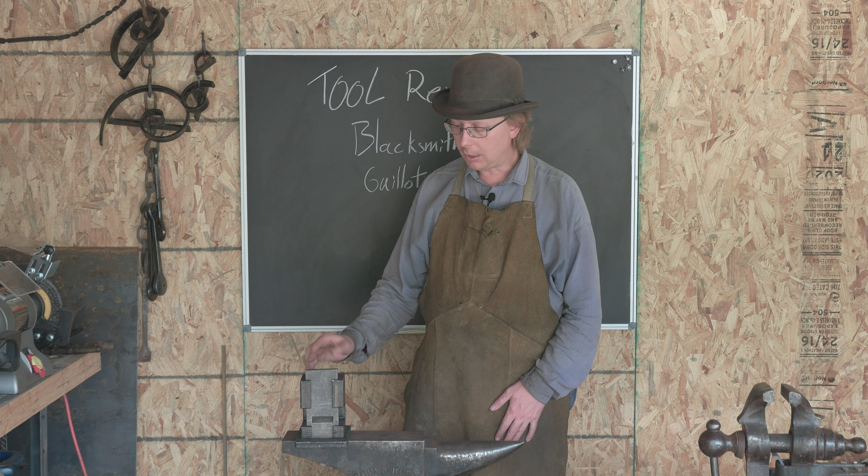You will need an Allen wrench to put it together, which it doesn't come with, as well as a socket wrench, both of which you are probably already going to have. Some Loctite is maybe not a bad idea, especially where these screws are going in to kind of hold things

together. They do tend to come loose if you don't have some Loctite or something in there holding it closed.

As you're hammering on the dies, you're putting a lot of force and it shakes, and those screws will come loose on you. So a little bit of Loctite will take care of that.

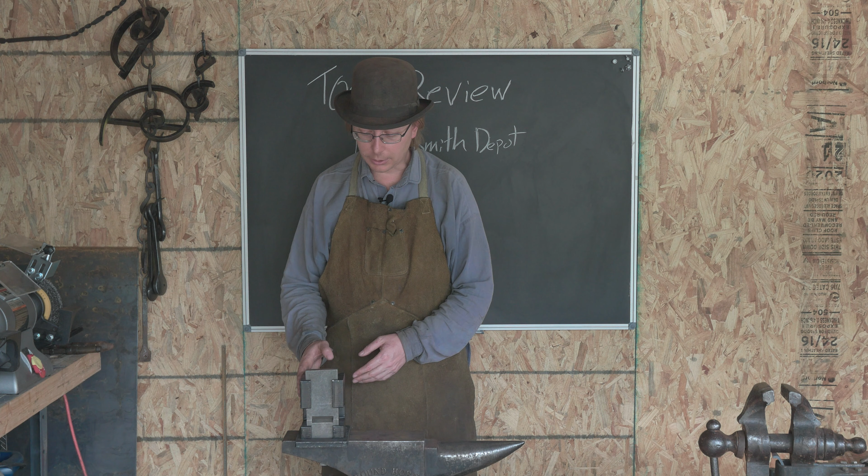But like I was saying, what this is used for is fullering in on two sides at once, or making a cut through steel from two sides at once. You can do the same thing. Let me grab something and I'll show you.

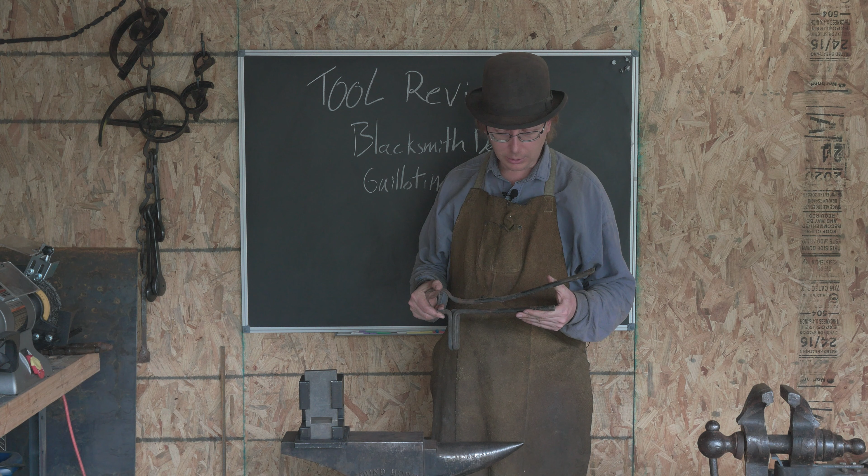So what I was looking for there is a spring fuller. This one's a little bent out of shape here. But the Blacksmith Depot guillotine, any guillotine, and the fuller kind of accomplish some of the same goals, right?

If I take a look at this large round die here, which is a 1/2 inch round die, and I think this is 1/2 inch square stock. Both of these are going to do the same thing. If I put a piece of steel in here, hammer down on it, it's going to hammer on both sides of those at the same time.

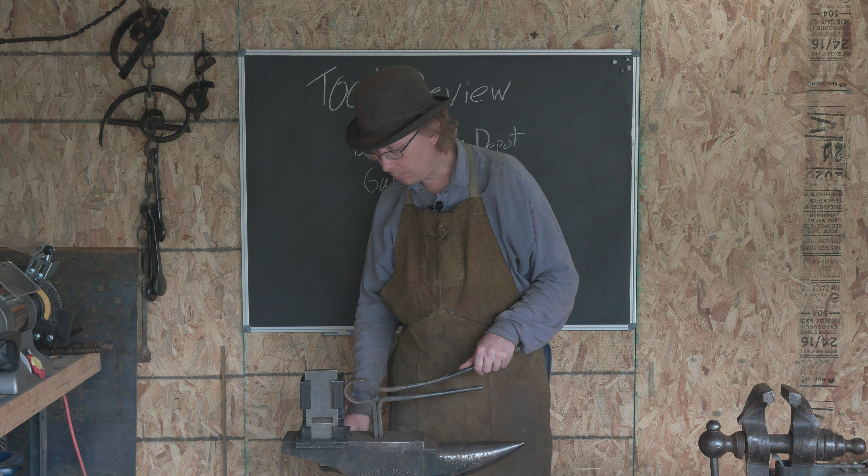You can get the same effect with the 1/2 inch die here from the Blacksmith Depot guillotine. What the guillotine's going to do that is a lot harder to do with a spring fuller like this is some of these other dies.

So we've got a wide variety of dies here, and hopefully you're able to see that in the video, where there's a cutting surface on one side, and then there's a gap here that is raised up from the foot.

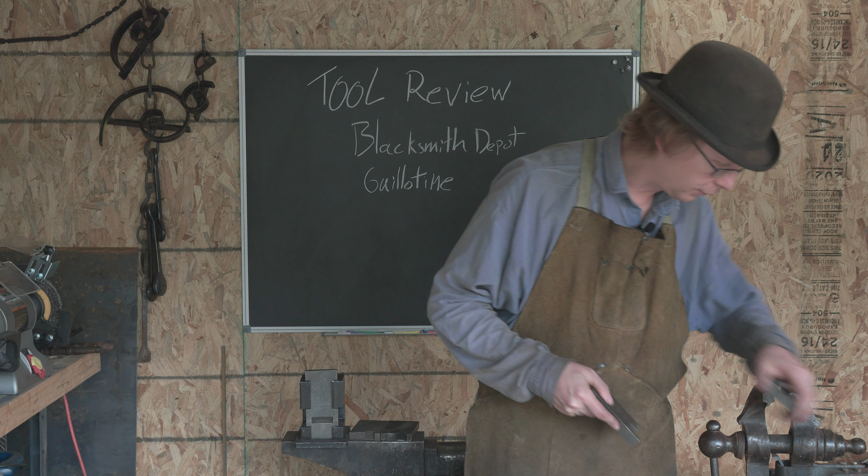So if I grab the opposite side of this, it's a 3/8 inch one here,

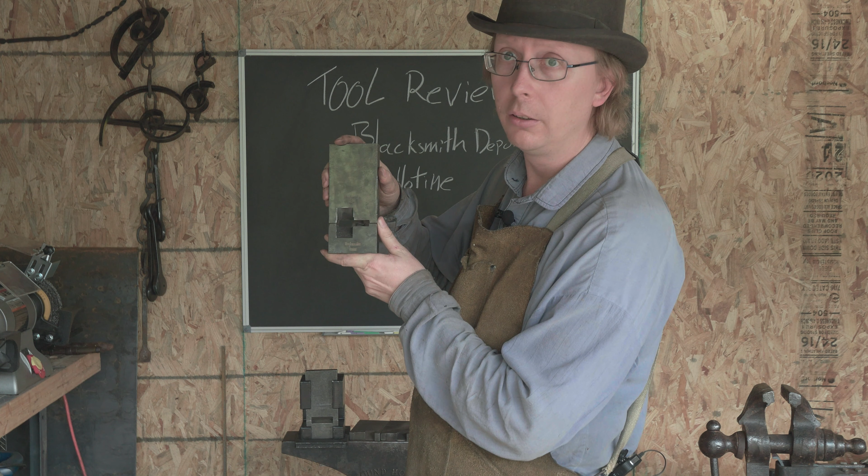get kind of close so you can see. So these two are going to go together like this in the guillotine. And what it does is it gives you a 3/8 inch gap here and then a 3/8 inch gap here.

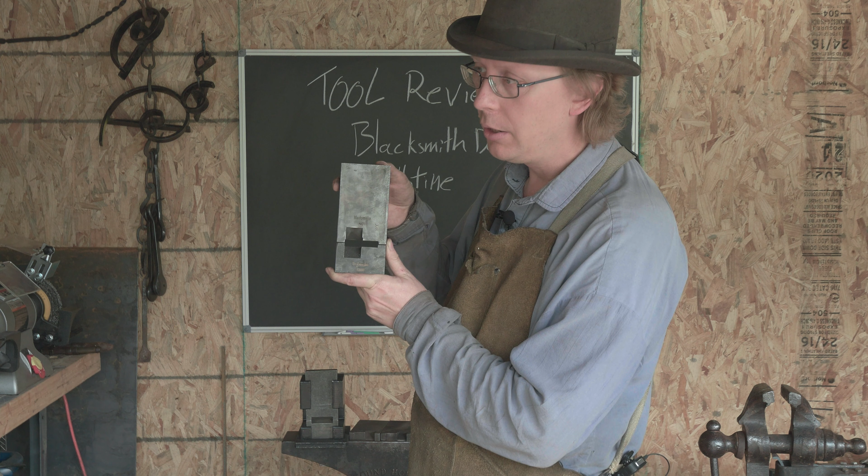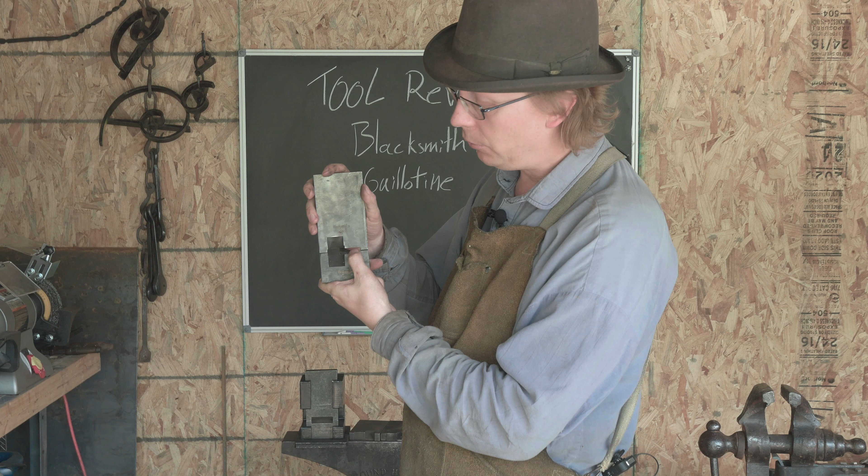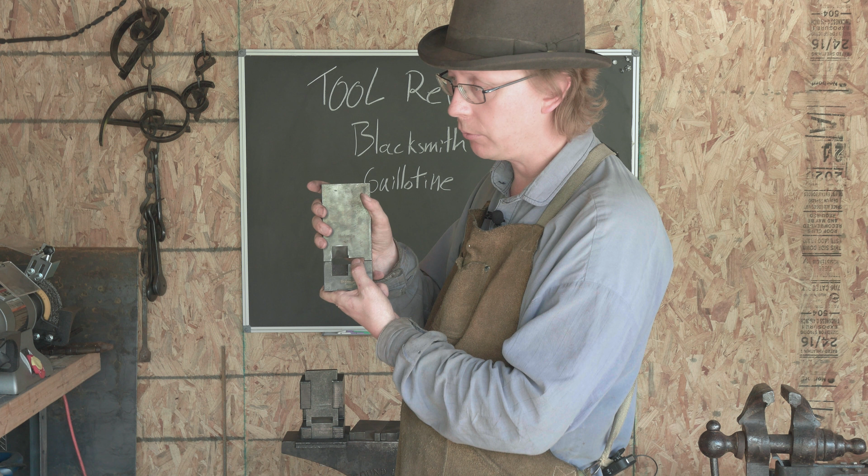So I can take a larger piece of stock, put it in, and then cut a shoulder that's 3/8 of an inch. I can then use this flat section here in order to draw out the material past that cut all the way down to 3/8 of an inch, so that I've got a nice round 3/8 inch section, or square 3/8 inch section, shouldered off from a larger material.

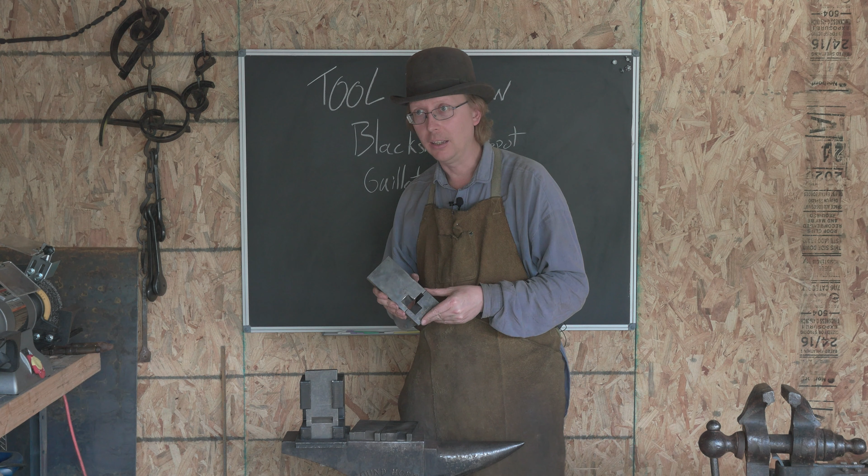This is incredibly useful when you're making tenons, or you're going to rivet something and you want to create a shoulder and then use the tenon in order to rivet two pieces together. Can you do this over the edge of the anvil? Yeah. Is it harder? It definitely is, right? You have to have some pretty accurate hammer blows as you're doing that set down. There's a lot of a chance for some missed blows and messing things up. This is pretty surefire and works well every time.

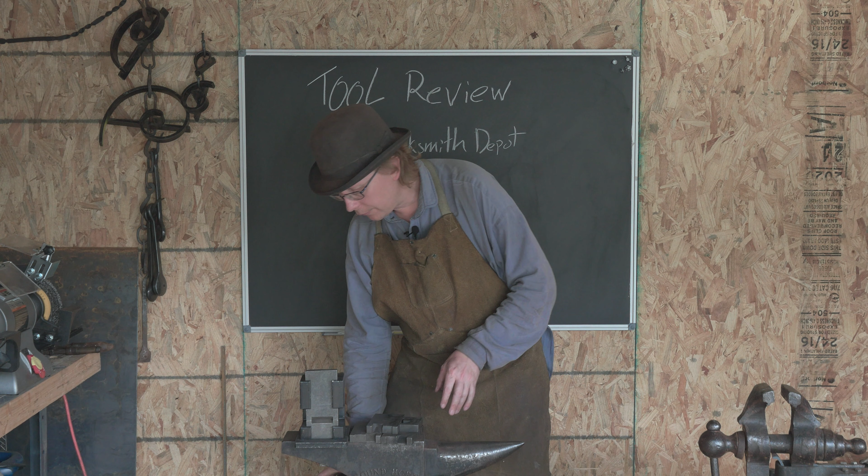So we'll actually take a look at how to use this tool in order to make a tenon. That'll be kind of the demo portion of this. With these kits, if you buy all of the sizes for these kind of tenoning, you get a 1/4 inch, a 3/8 inch, a 1/2 inch. On the round dies, you get a 1/2 inch. What is this one? A 1/4 inch. And then this one here is actually a side cutter. So,

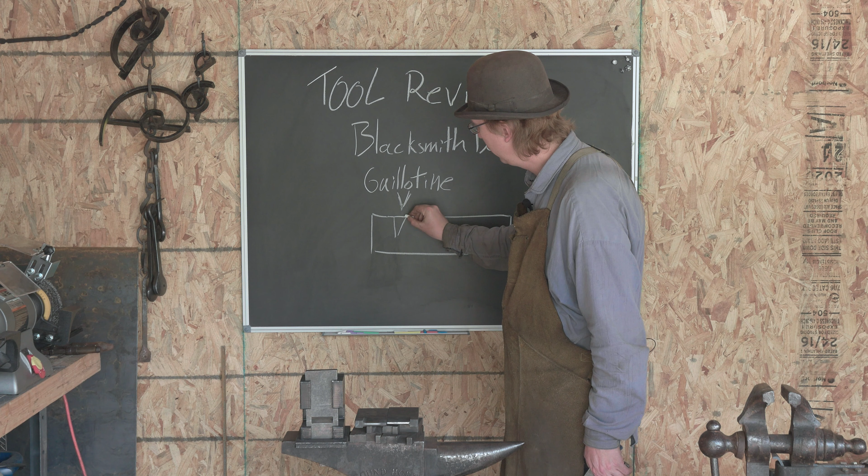right, if you got your Hardy tool, your cut-off Hardy tool, depending on how you grind it, or using something like this, you can set it up so that as you cut through a piece of steel, you get one side that's flat and all of the angle is on the other piece. And that's what this is used for. So if I want to cut something where I've got a flat side, actually I'll draw this here. Right, I've got my bar of steel. And if I've got a cutter that's shaped like a V, as this goes through, what you're going to wind up with, right, if I cut through from both sides, is a bit of an angle on each side.

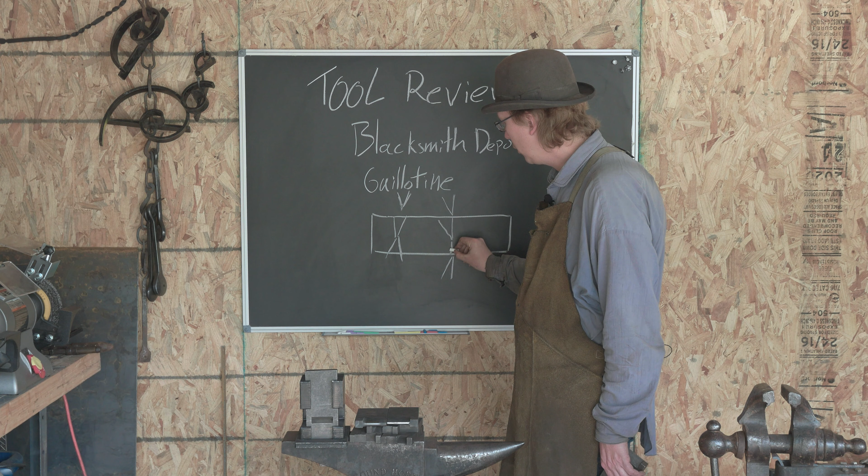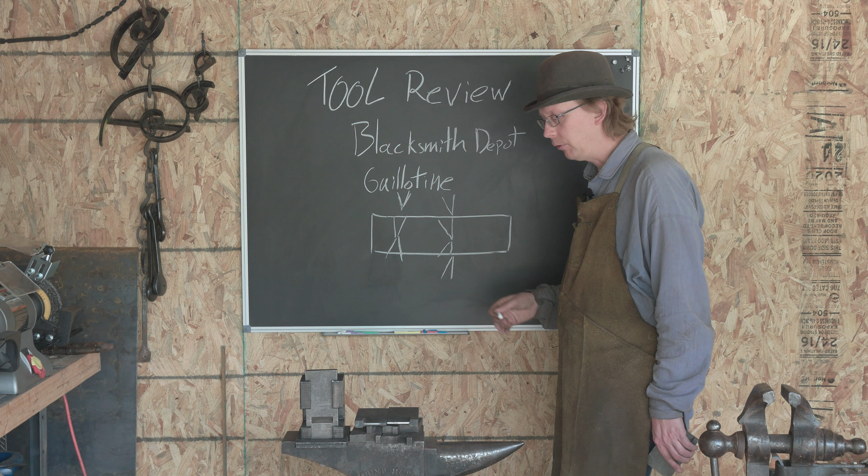Using a side cutter like this, or a hot cut that's sharply angled, where you've got a shape like this, right, and for the Guillotine tool, you're going to have another shape like this. As this goes down and it cuts, you wind up with a cut that matches that shape. So if you need something where you're cutting off a chunk and you want a flat end here, this lets you put all the kind of angle from the cut onto the waste, the throwaway piece that you're not going to be using. So it gives you a nice flat edge. Again, you can do similar things with Hardy tools if you ground them correctly, handheld hot cuts, things like that. The Guillotine tool just gives you a lot of control, makes it very easy in order to do that in a repeated, consistent way.

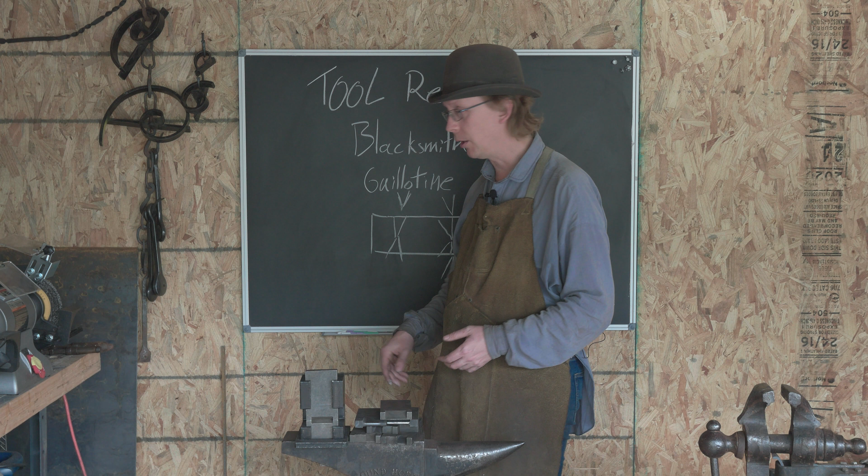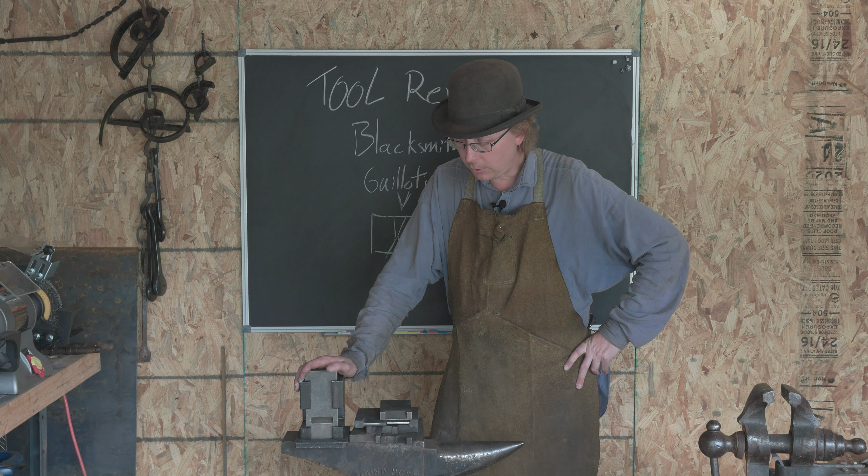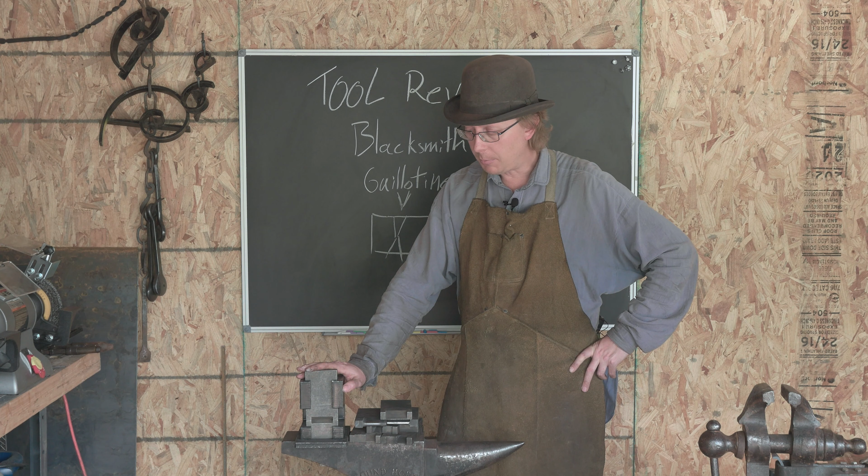And if you are a smith who's doing a lot of work, you got to do a lot of cuts, you want to do them quickly, then this is going to be a tool that saves you a lot of time. So, it's a great tool. I'm very happy with the purchase, even though it was reasonably expensive. Everything has held up well to a fair bit of use. I do use a brass hammer on them, since these are, I think, S7 steel or some pretty hard steel. I want to make sure that I'm not messing up my hammers or these. They beat up your brass hammer pretty good. There is no doubt about that. I see a fair number of flakes flying off the brass hammer as I'm hammering away on it, but that's what brass hammers are there for and what they should be used for.

So let's get the forge fired up, and we will use one of these tenoning dies and maybe one of the fullering dies to show you guys how it works and what it's used for. This ability to fuller and isolate material is just hugely useful as a blacksmith. I use it all the time in things as diverse as making spoons, making multi-part roses. You'll use it just anywhere, even decorative elements, right? If you've got a long handle on something, putting a couple fullers in to give it some visual interest can really kind of step up the level of quality in the material that you're producing. And this is going to come in super useful for that. So let's, like I said, get the forge going, get some steel heated up.

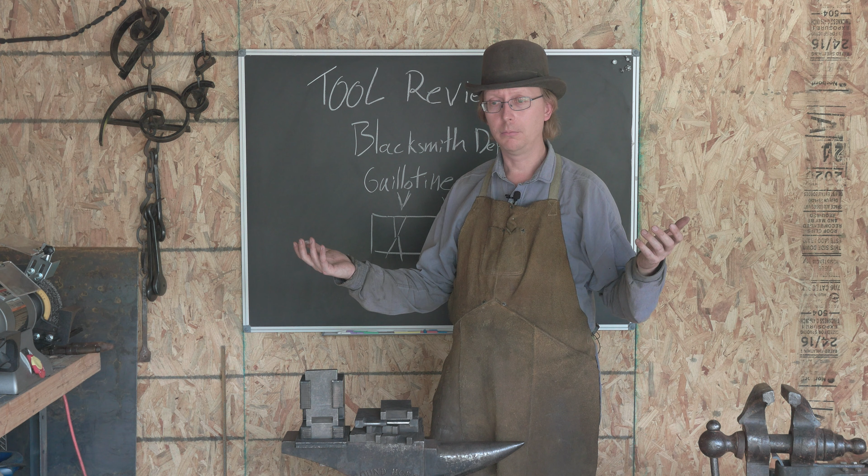I'll show you guys what this looks like in use and give you my final impressions on it. And I think I've already said I would recommend buying it, so I won't give you a final recommendation, because I think if you are looking for guillotines, you're going to be pretty happy with this one. You can make your own and certainly do it for cheaper, especially if you have access to welding equipment. Go look on videos for that. But if you want to buy one off the shelf so that you're not messing around making your own, this is a great option. All right, I'll see you guys once the forge is going.

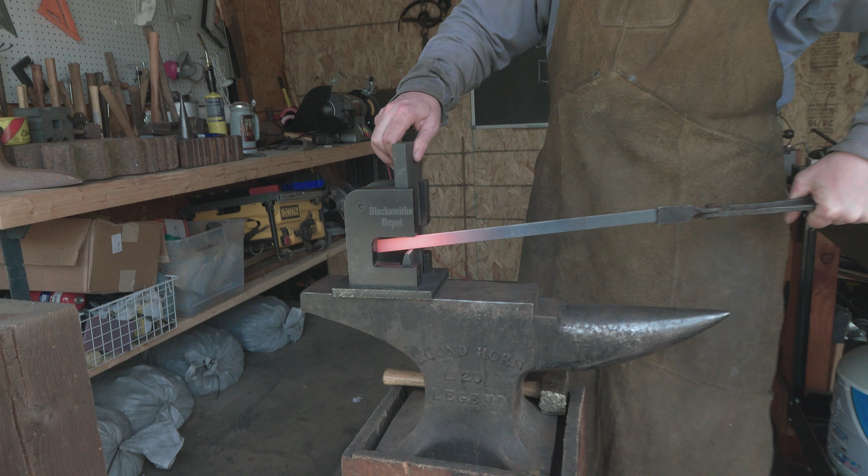All right, so let's take a look at how this works. I've got a piece of flat bar in there. I've got a 1/4 inch fullering die in the guillotine. We're going to pull this out, set it in. I want to give it a good initial hit here. Make sure that I'm staying right in that same groove.

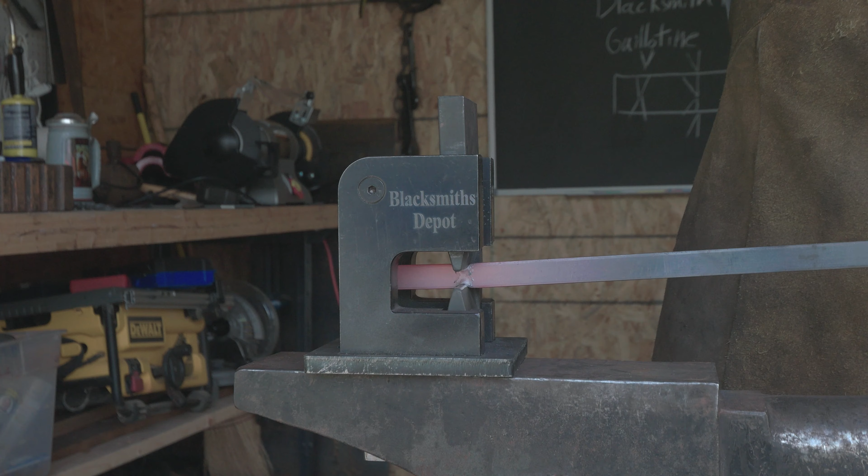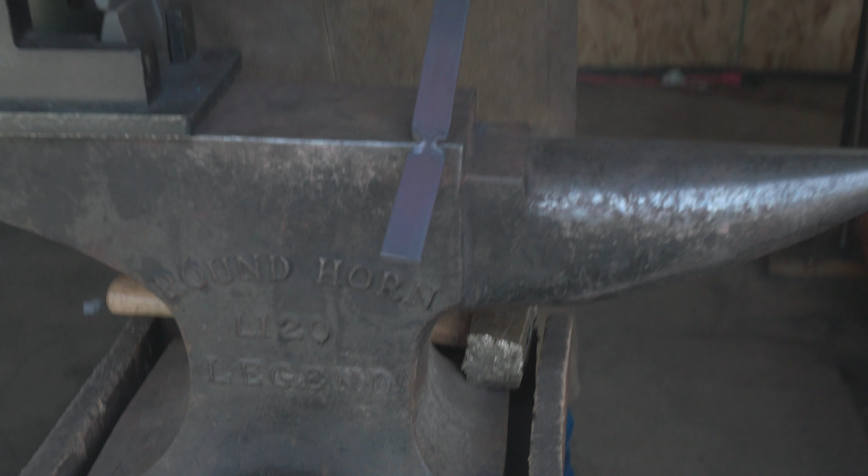You can see what I've got now is a very nice, very even fullered end from each side. This is, like I was saying before, really useful, right? I can now take this if I want to put a twist in it, or if I want to spread the material out. Maybe I'm going to make a spoon. I'll spread all this material out here at the end in order to form my spoon shape. This part becomes the handle.

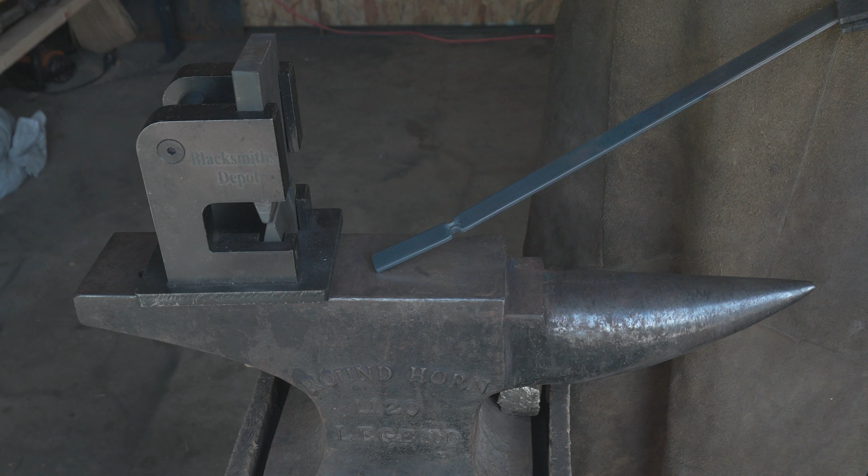This ability to isolate material, do so accurately, is great. Like I said, you can do some of this stuff with the spring fuller as well. I find it's not quite as accurate as the guillotine. I've got another piece heating up. I'm going to grab one of the tenoning dies and we'll put that in and I'll show you guys how that works as well. I've got a piece of 1/2 inch steel here that's been heating up. I've got a 1/4 inch tenoning die in. Bring that out. I'm going to put it on the cutoff side first.

Set it right there and give it a good strong hit. Rotate this. Rotate it again. I want to make sure I've got all the corners cut in. Let's pull it out and take a look at what we've got.

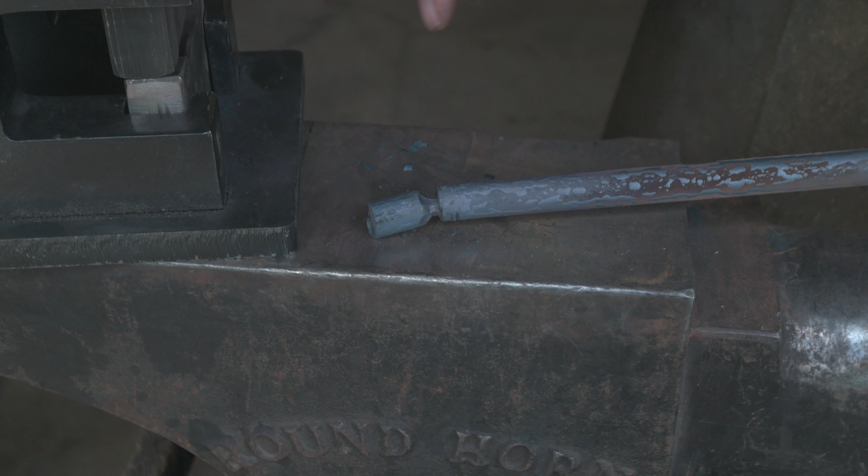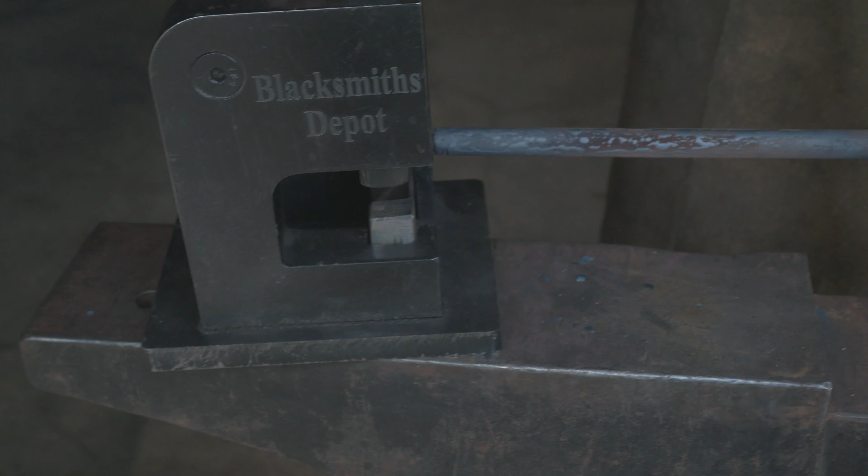So you can see now what I've got is a pretty nice shoulder, right? All the angle is going into the tenon. The shoulder is pretty straight, and a lump of material here at the end. I'm going to get this hot again, bring it back out, and I'm going to put it in this flat section and start hammering down. That gives me a 1/4 inch gap, and I can draw this material out into a 1/4 inch tenon.

Drop it in here. Start flattening this out. Flip it over. We'll take another heat on this to finish it up, but you can see we're starting to draw it down to that 1/4 inch and leaving the parent stock alone. Put it back in there. Let's keep working it.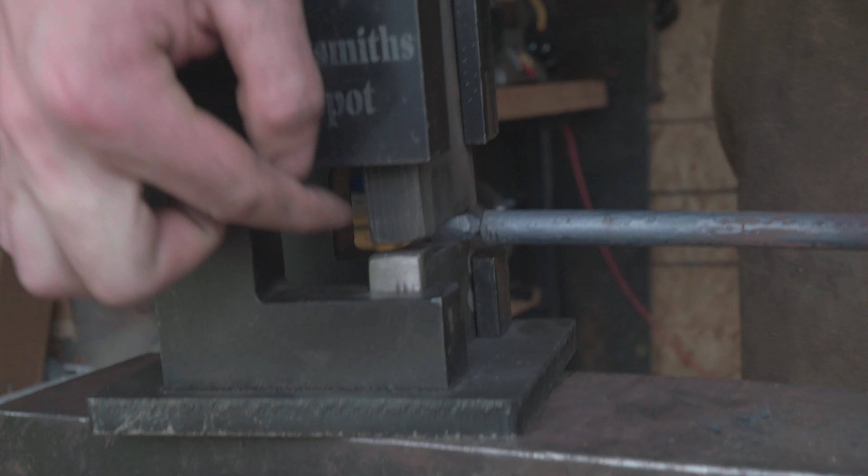So you can see we can keep going there. And it's real easy to tell, right, once I've got the steel in there and this gap disappears, that means I'm down to that 1/4 inch. I'm going to do a couple heats off camera here, finish this up, and I'll show you guys what it looks like. All right, so I'm going to take one last hit on this in the guillotine tool and show you guys what it looks like.

I did chop off about half of it. I tenoned off way too much initially, and it was getting pretty long. So we'll bring it over here. One final little cleanup pass.

There we go. So you can see what we wound up with here is a nice shoulder, a tenon coming out. If I was going to take this and set, you know, this was a fence or something like that. I was going to take another piece along, set it down. I can now pass this through, have it sit on the shoulder, rivet that down, and it's nice and securely attached.

There's a monkey tool that you can use to clean up that shoulder even more. We'll take a look at that in a future video at some point. But again, overall, guillotine tools are really nice. They're great to have. This Blacksmith Depot one has held up well. It's a good tool. I would recommend it. If you don't get this one, figuring out some way to get a hold of a guillotine tool is a good choice.